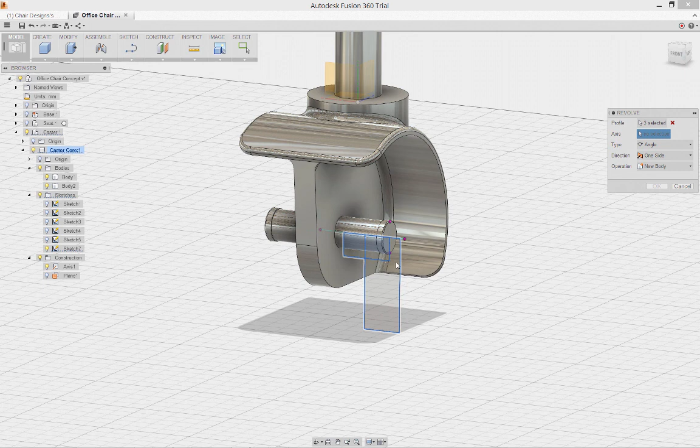With our sketch complete, we can now begin solid modeling. Fusion 360 also contains tools that will enable us to use primitives to create solid models, but in this case we'll use a classic revolve tool. We'll select profiles that we want to use and the axis. We'll also create a new body. In Fusion 360, bodies can be represented as though they were parts of an assembly.

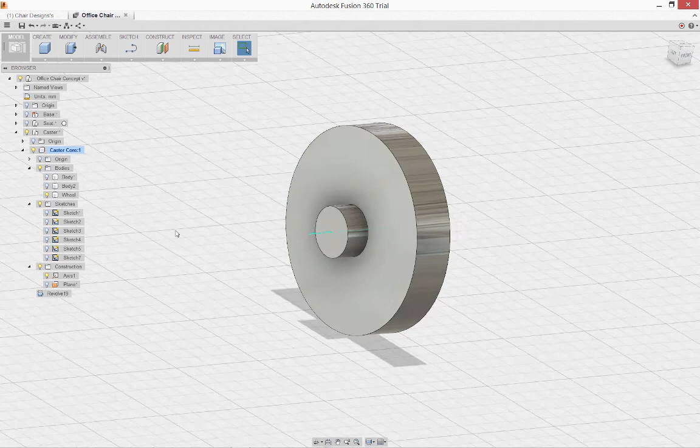In this case, we can rename our body Wheel. And since we want to focus on this body, we can go ahead and turn off the other bodies in this component. With the primary shape finished, we can begin to place features.

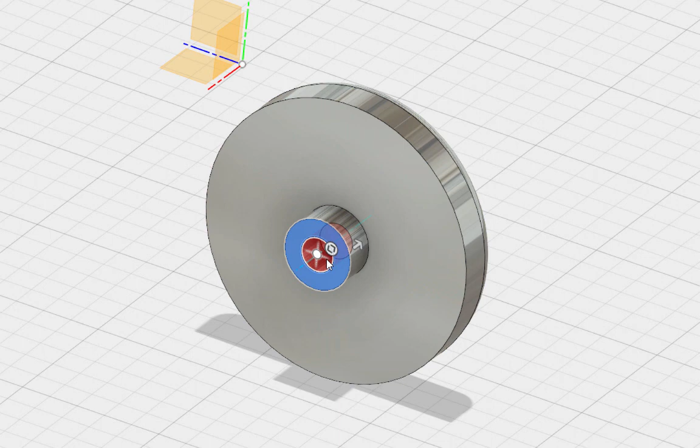On the marking menu in the solid modeling environment is a tool called Press Pull. Press Pull is a multifunction tool. It can move faces around, apply fillets to sharp edges like we're doing in this case. We can also find other key tools like the Hole tool. We'll select the location. The hole feature can be moved around if we like. But we can also center it very easily by selecting the rounded edge.

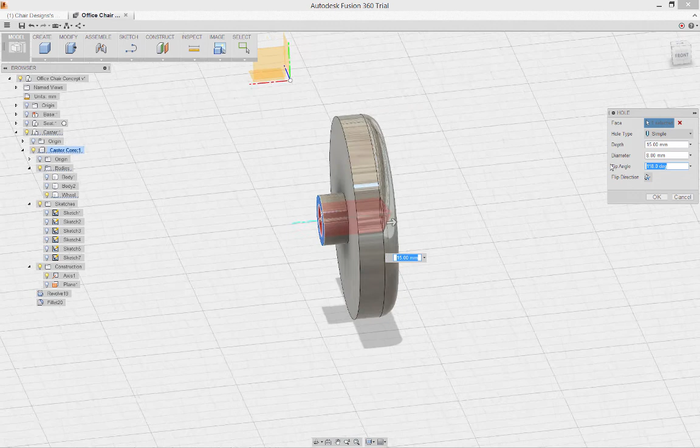We'll set the diameter to 8 millimeters. And we'll change the point angle. Let's get a better view of that. So right now it's a traditional 118-degree point. What we want to do is just have a flat bottom. So we'll set that tip angle to 180 degrees. We'll set our depth and we'll create our hole feature.

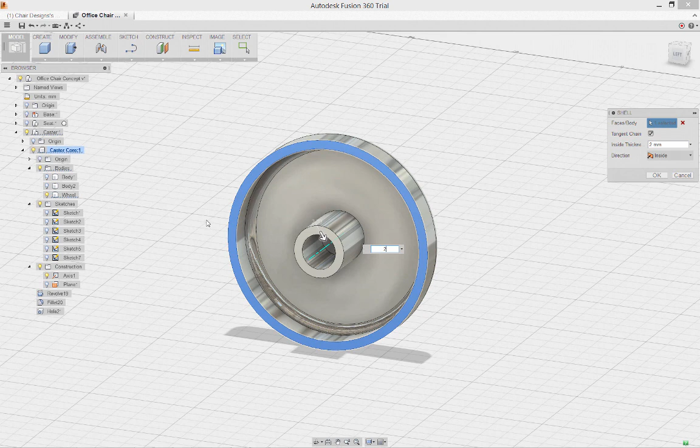Now we want to remove some of the mass from our wheel. So we'll use our shell feature. We'll tell it to remove the large face on the back of the wheel and set the thickness to 2 millimeters. Since we've removed a lot of material from the wheel with our shell, I want to reinforce it with a rib. To do this, we need to create a sketch.

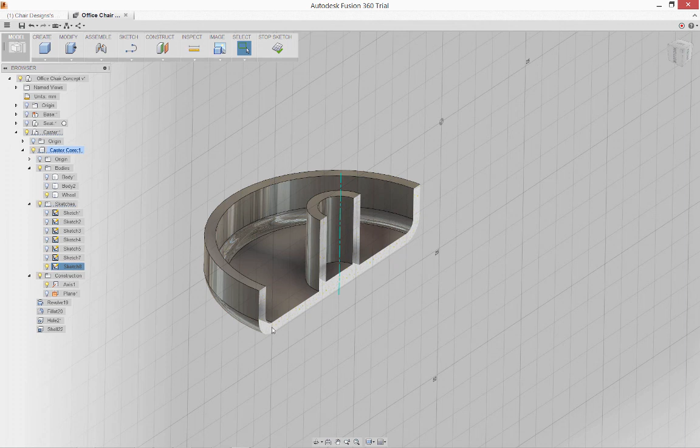We'll use the plane that was used to sketch our original profile, and we'll slice our part at the sketch using Slice Sketch. This will open up the wheel to make it easier to see what our sketch is. First, I'll draw a line from near the hub to near the rim. It doesn't have to be touching.

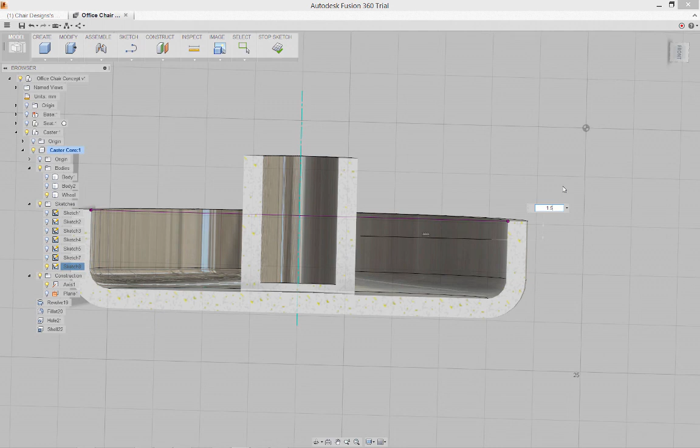Next, to be able to measure what distance it is offset, I'll project the edge of the rim into the wheel and apply a dimension between the two. With this finished, I can stop my sketch, which will return my wheel to full 3D.

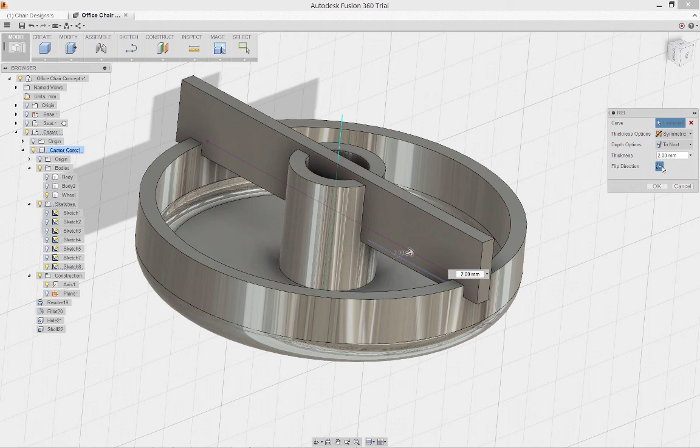And then I'll use the rib tool, selecting just the portion of sketch that I want. I'll set my thickness and set the appropriate direction for the rib. You'll see it fills in the gap. I'll use the Press Pull tool again to set a 1 millimeter radius on this 2 millimeter rib so it completely rounds the top.

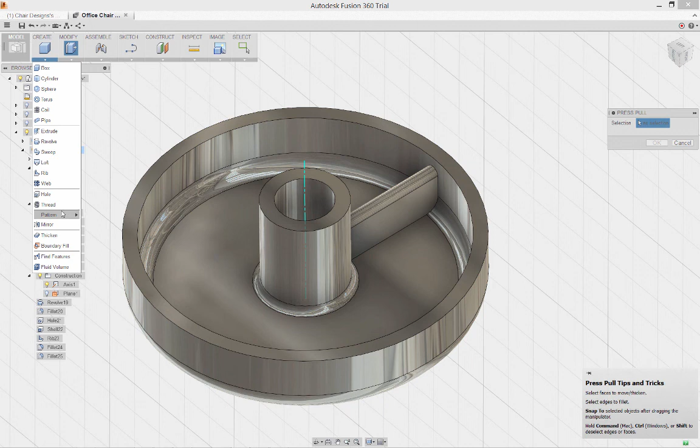I can put another fillet around the base of the hub at any time, and Fusion 360 is able to accommodate this. Since I'm working without history, I can select the faces of the rib, select an axis, and use a circular pattern to replicate it. Dragging the manipulator, I can set the number. In this case, we'll just stop with 5.

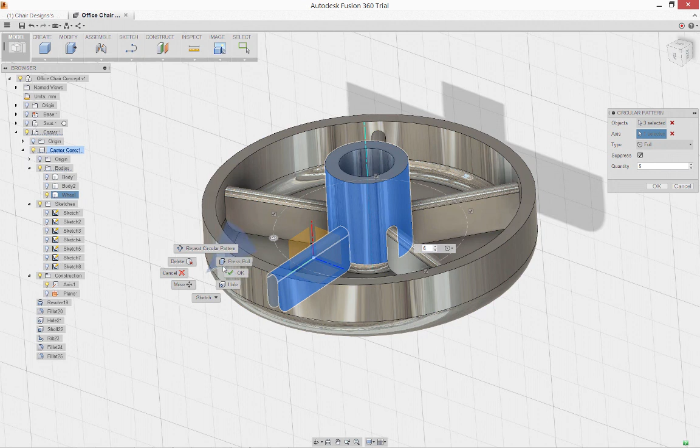I can suppress any instance of the pattern, and we'll just go ahead and create the ribs. Once again, using the Press Pull tool, I'll select some edges to apply fillets between the ribs, the hub, and the rim. And we can just drag out a distance. And we'll apply it.

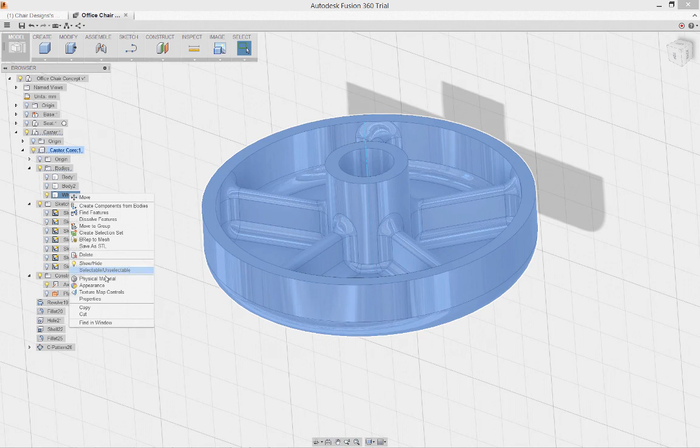Now that I'm finished with the geometry of my wheel, I want to go ahead and make it stand out a little bit. I'll set an appearance override for this model. I want to use textured plastic with a random pattern on it. It looks pretty good, but I'd like to just modify it just a little bit. This is a situation where you can have a little fun and just explore different patterns.

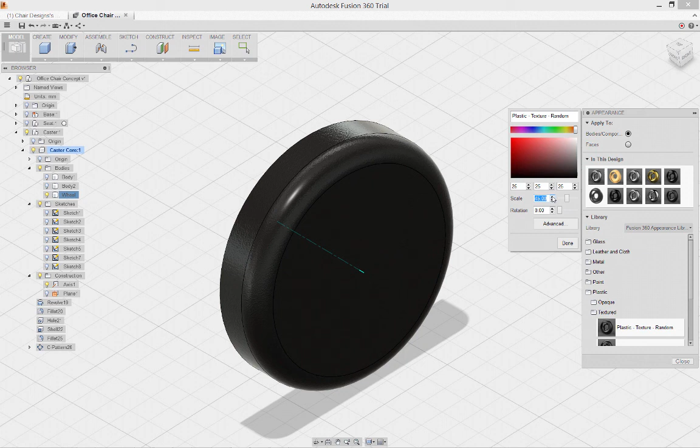Let's go ahead and apply it with just a little reduction in the scale. And I think we'll call our wheel complete. Let's bring back the other two bodies that are members of our caster core. And we'll be ready for the next steps.